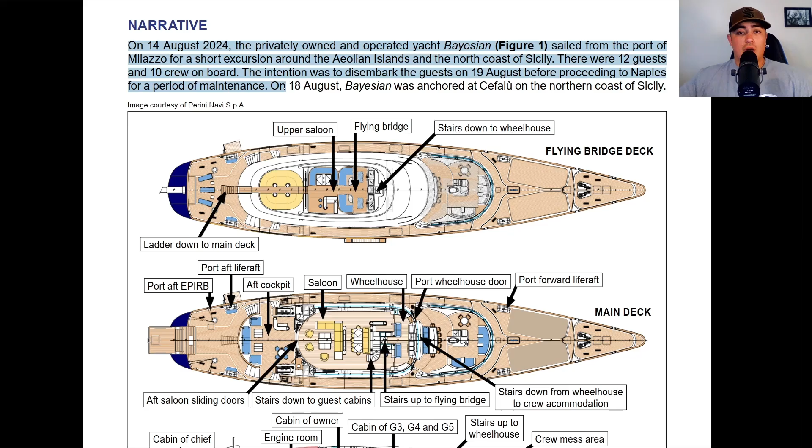Narrative: on August 14, 2024, the privately owned and operated Bayesian sailed from the port of Milazzo for a short excursion around the Aeolian Islands and the north coast of Sicily. There were 12 guests and 10 crew on board. The intention was to disembark the guests on August 19th before proceeding to Naples for a period of maintenance. On August 18th, the Bayesian was anchored at Cefalù on the northern coast of Sicily.

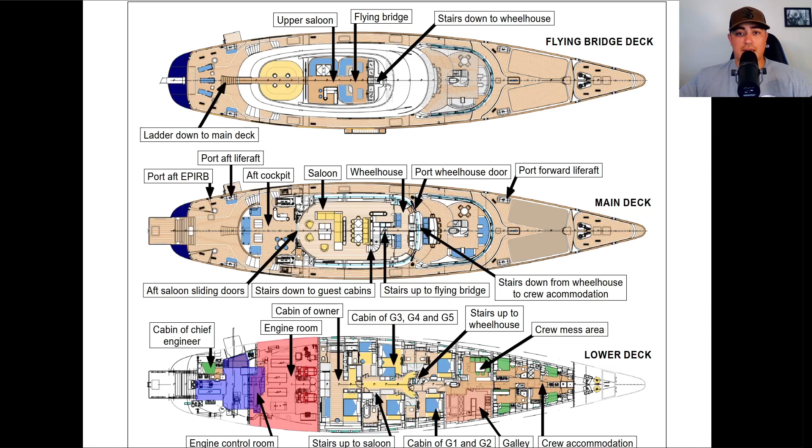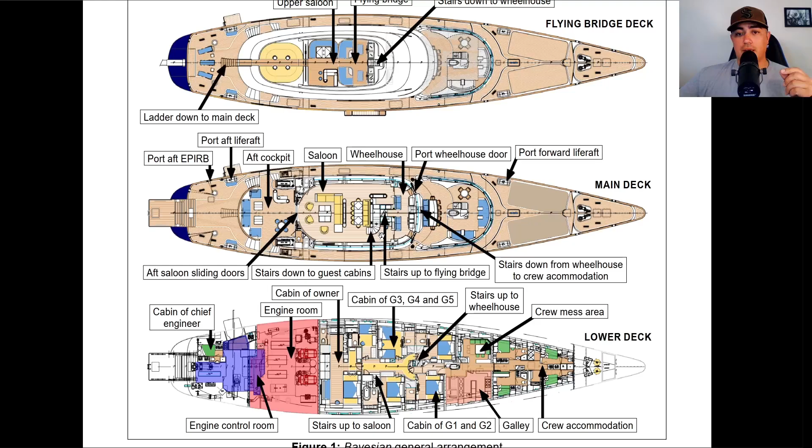And here they just provide the plans of the Bayesian. So this is the flying bridge deck and the main deck. This is everything you could see from the surface, and they're mostly focusing on the upper saloon, the flying bridge at this location, and then the stairs down to the wheelhouse. I know these are a lot of terms to remember, but keep them in mind for when we dive further into this report, because they are going to reference these locations.

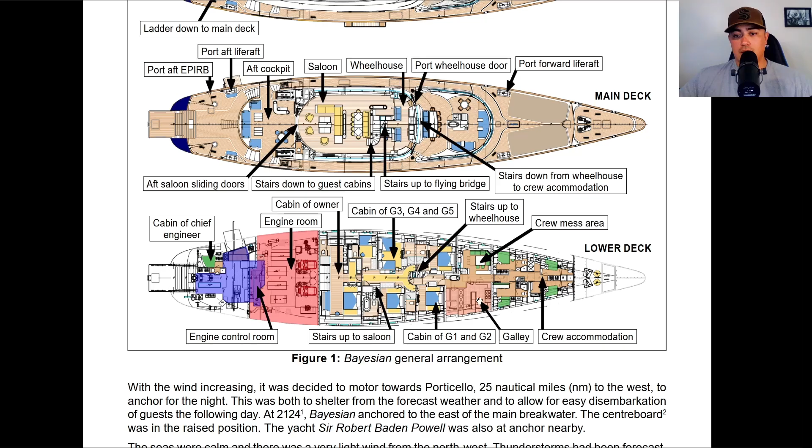One big area of concern here is the engine room, so keep that in mind. This is on the lower deck, towards the stern back here. This is the cabin of the chief engineer, and this is the cabin of the owner. The rest of the guests, G1, G2, G3, 4, 5, they're all right here in this area on the lower deck. And then you've got the galley right here and crew accommodations. So just keep these in mind as we dive further into this report.

With the wind increasing, it was decided to motor towards Porticello, 25 nautical miles to the west. They knew this wind was increasing and coming, so they went into Porticello to anchor for the night. This was both to shelter from the forecast weather and to allow for easy disembarkation of guests the following day.

At 21:24, Bayesian anchored to the east of the main breakwater. The centerboard was in its raised position, which is also what we're calling the keel - the keel or the centerboard. It's called the centerboard on a lot of these larger vessels; a lot of ships that we work on call it the centerboard. So they very clearly state here: the centerboard was in its raised position.

The yacht Sir Robert Baden-Powell was also at anchor nearby, which is the only other sailing vessel you could see in the photos moments before the Bayesian sank. The seas were calm and there was a very light wind from the northwest. Thunderstorms had been forecast, and those on board Bayesian could see occasional flashes of lightning away to the west.

Bayesian's skipper left instructions to be woken by the overnight watchkeepers, deckhands DH1 and DH2, if the wind speed increased above 20 knots, or if there were signs that the Bayesian was dragging anchor.

Having checked the latest weather forecast, the skipper went to bed. By 0030 - 30 minutes after midnight - the last guest had retired, leaving deckhand 1 and the evening steward, S1, on duty. At 1 a.m., deckhand 2 took over watch from deckhand 1.

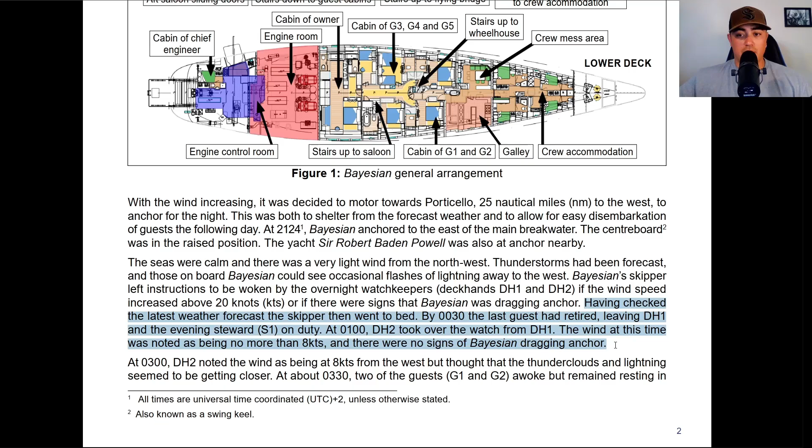The wind at this time was noted as being no more than 8 knots, and there was no sign of the Bayesian dragging anchor. At 3 a.m., deckhand 2 noted the wind at 8 knots from the west, but thought the thunderclouds and lightning seemed to be getting closer. At about 3:30 a.m., two of the guests, guest 1 and guest 2, awoke but remained resting in their cabin.

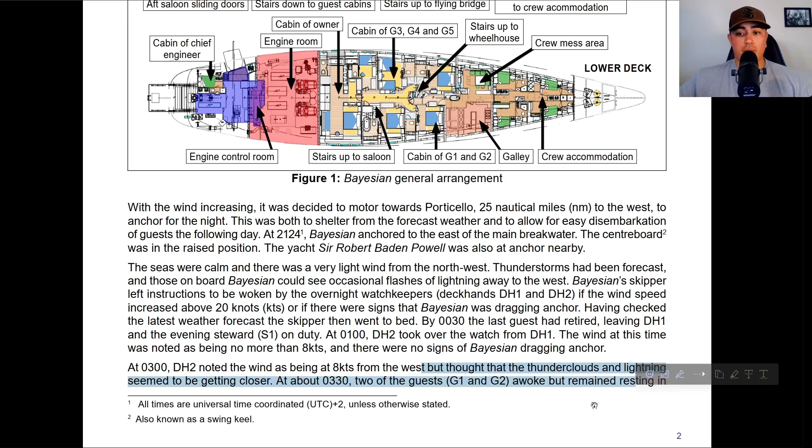At approximately 3:55, deckhand 2 videoed the advancing storm and posted it to their social media feed. You guys may have seen that clip going around - it was like the last video taken on the Bayesian.

Deckhand 2 then went onto the deck and closed the forward hatches and cockpit windows to protect Bayesian's interior from the rain that had started falling. Deckhand 2 noted that the wind had picked up to 30 knots and was broad on the port bow. Bayesian was now listing to starboard, and deckhand 2 thought the vessel was dragging its anchor.

At around 3:57, both Bayesian and Sir Robert Baden-Powell started dragging their anchors in the rapidly worsening weather. At around 4 a.m., deckhand 2 ran below and woke the skipper - this was 5 minutes after they had noted the wind at 30 knots. So things are moving pretty quickly here.

Together, they returned to the flying bridge. At about the same time, the chief engineer woke up. Having experienced bad weather at anchor before, the chief engineer got up and walked to the engine control room to prepare the vessel for maneuvering - he's getting ready to start the engines so they can maneuver and work with the weather rather than just being a sitting duck waiting to get blown over.

After making sure that all 3 generators were running, the chief engineer went to the wheelhouse to start the steering pumps and hydraulic pumps for the controllable pitch propeller.

The chief officer, chief steward, chef, and stewards had all been awoken by the yacht's change of motion. They dressed and made their way out of the crew accommodation, which is at the lower level towards the bow. At this time, the Bayesian was estimated by those on board to be listing between 10 and 20 degrees to starboard.

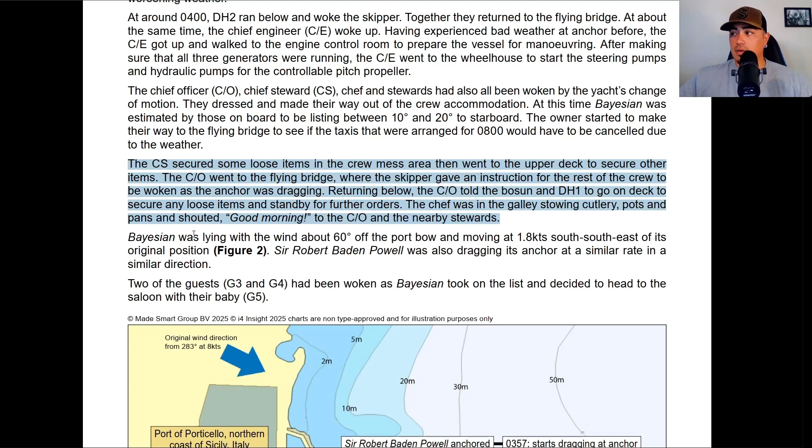The chef was in the galley, stowing cutlery, pots, and pans, and shouted 'Good morning' to the chief officer and nearby stewards. So he too was in the lower level preparing the kitchen and stowing away pots, because those are all banging and clanking around.

The Bayesian was lying with the wind about 60 degrees off the port bow and moving at 1.8 knots south-southeast of its original position. Sir Robert Baden-Powell was also dragging its anchor at a similar rate in a similar direction, which we can see right here.

So this is where the Bayesian was anchored, and this is where the Sir Robert Baden-Powell was anchored, and you can see how quickly they drift off position. This is where Sir Robert Baden-Powell ended up, and here is where the Bayesian currently rests.

Two of the guests, G3 and G4, had been awoken as the Bayesian took on the list and decided to head into the saloon with their baby, who we're calling G5.

The chief officer returned to the flying bridge and briefed the skipper on a few activities. The skipper told the CO to check if the chief engineer had started the engines and pumps so that they could maneuver Bayesian into the wind.

Arriving in the wheelhouse, the chief officer saw the chief engineer there and was informed that Bayesian was ready to maneuver. The chief officer then shouted up to the flying bridge to inform the skipper.

The owner, G3 and G4, carrying G5, arrived in the saloon in the wheelhouse area as a rain-soaked CS came in from the upper deck.

As the skipper prepared to move Bayesian into the wind from their position on the flying bridge, the wind suddenly increased to more than 70 knots. The awning over the flying bridge ripped from port to starboard.

At 4:06 a.m., Bayesian finally heeled over to 90 degrees to starboard, taking less than 16 seconds to do so. So instantly, they're kind of leaning in the wind, and then it just goes flat.

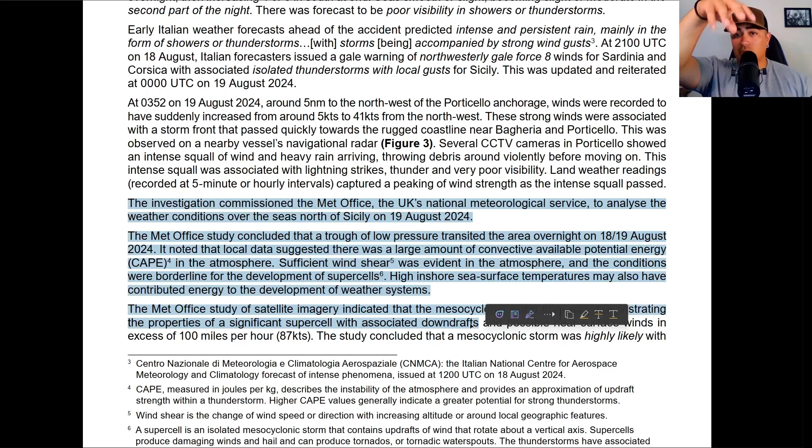And possible near surface winds in excess of 100 miles per hour or 87 knots. So these guys were in like a full blown hurricane.

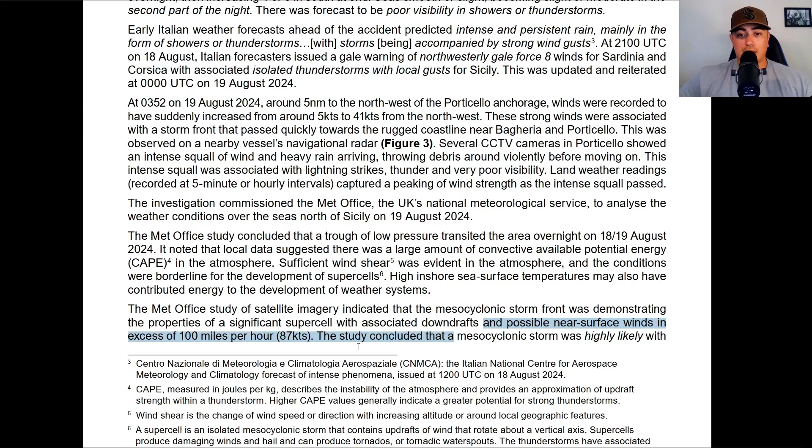It says here that the study concluded that the mesocyclonic storm was highly likely, with an associated supercell being probable. It also concluded that tornadic waterspouts and downdrafts that were possible, where local winds could reach extreme hurricane force well in excess of 64 knots.

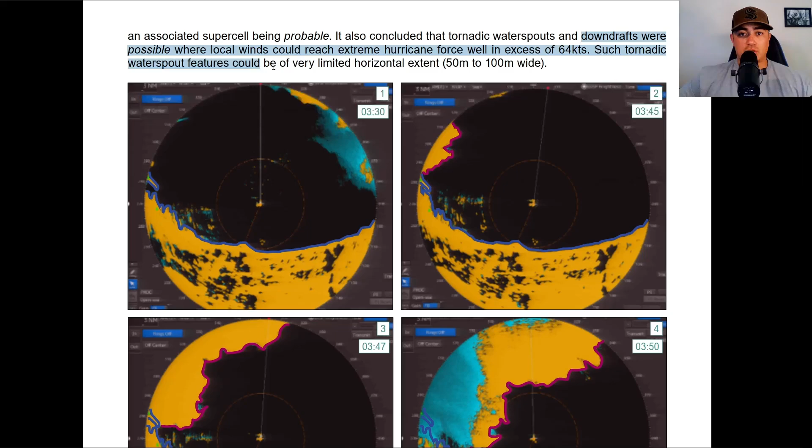Such tornadic waterspout features could be of very limited horizontal extent. These would be waterspouts of 50 meters to 100 meters wide. That's pretty wide. So I'm not a meteorologist here, but this, I believe, is the location for the Bayesian, and this would have been the weather event moving in.

So you could see how massive that was and how quickly it moved in. Within a matter of 20 minutes, it covers nearly half of this bay here.

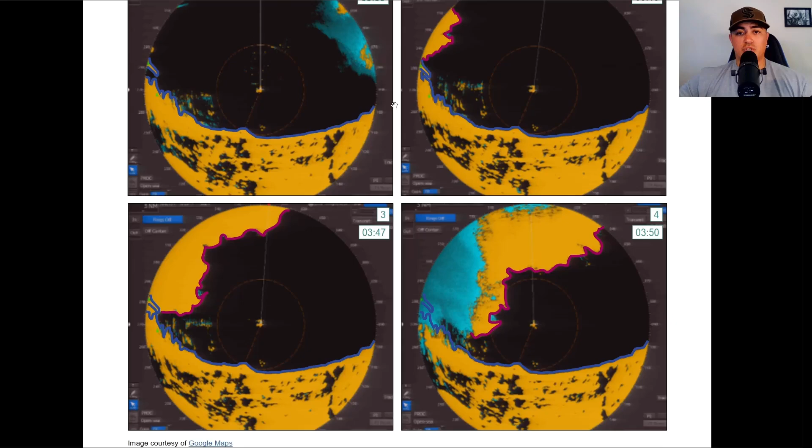All right, so let's go over the stability real quick. The Bayesian was built in 2008 as Sailing Yacht Salute. The Stability Information Booklet (SIB) was submitted for approval to Ensign, the then large yacht service of the UK Maritime and Coast Guard Agency. On July 3rd, 2008, the SIB was approved against the requirements of Section 11 of Merchant Shipping Notice (MSN) 1792, the Large Commercial Yacht Code.

The approved SIB was required to include curves of statical stability, or GZ curves, for specific loaded conditions. The Bayesian's SIB contained curves for sailing conditions at maximum load, contractual full load, and light load condition. In all three conditions, the centerboard had to be lowered, which we already know was raised. The angles of vanishing stability for the three conditions recorded in the SIB were 91.4, 92.3, and 84.3.

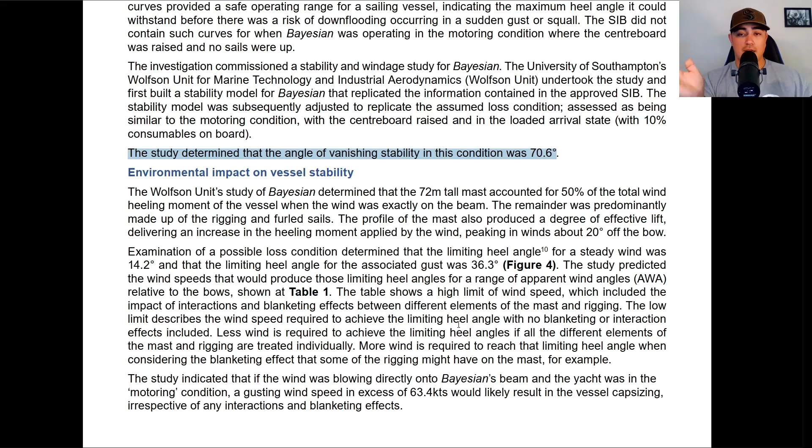Now they took the information in the stability booklet and combined it with all the meteorology information we just looked at, and they ran simulations. The study determined that the angle of vanishing stability in this condition was 70.6. So once the vessel leans over to 70.6 degrees, that's pretty much a point of no return, and it's not going to come back up.

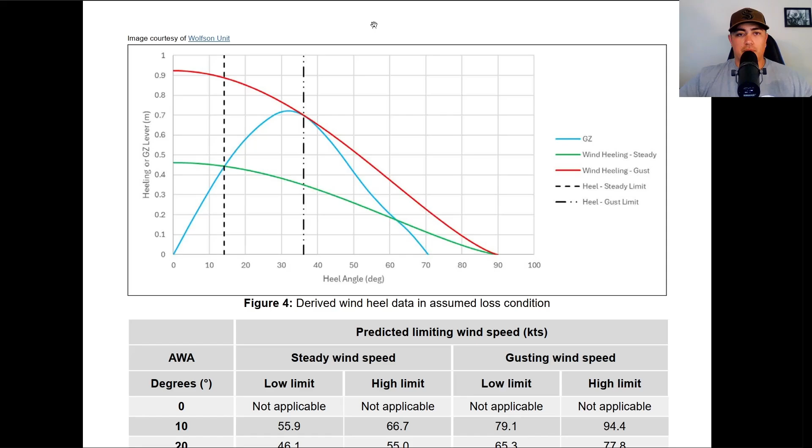Now here's the result of the study they were just mentioning. If anyone would like to interpret this data and provide a better interpretation for us in the comment section, I'll pin that comment so we can appreciate this data a little bit more.

So this is the summary of their investigation so far. The investigation has established the timeline of events on board Bayesian and documented these to the extent possible with the information gathered. The stability information presented is based on documents recovered and information gathered, and the assumption that the yacht's condition when lost was similar to the loaded arrival condition, i.e. 10% consumables on board. The effects of wind on the mast, boom, rigging, and upper works of Bayesian have been assessed using the available information on the yacht's construction and equipment.

Through the desktop assessment provided, the safety investigation has established that in the assumed loss condition, once Bayesian heeled over to an angle greater than 70.6 degrees, also known as the angle of vanishing stability, there was no chance of return to an even keel. The investigation also established that in the assumed loss condition, wind speeds in excess of 63.4 knots on the beam were sufficient to knock Bayesian over.

It is possible that Bayesian was similarly vulnerable to winds of less than 63.4 knots. These vulnerabilities, when in the motoring condition with sails lowered, centerboard raised, and 10% consumables on board, were not identified in the stability information booklet carried on board. Consequently, these vulnerabilities were also unknown to either the owner or the crew of the Bayesian.